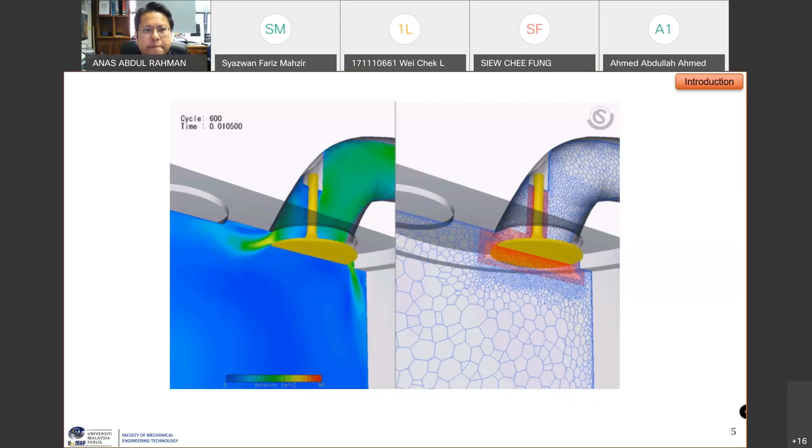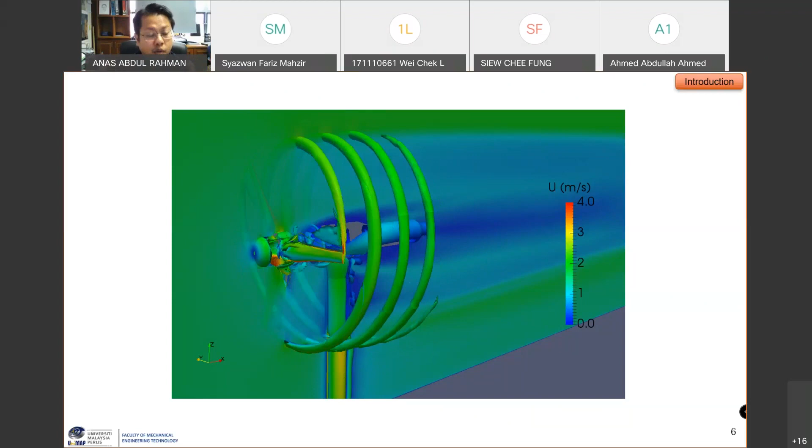But by using CFD, as you can see over here, this is just for one turbine, we can see the clear phenomena happening when the turbine is rotating, and also the wake. The most important part for this problem is the wake generated behind the turbine, downstream. Okay? So then we can plan, for example, instead of a squared array, we can use a staggered array. Instead of too close, let's say 1 meter behind the turbine, we can now put the second device, let's say, 2 meters from the first row.

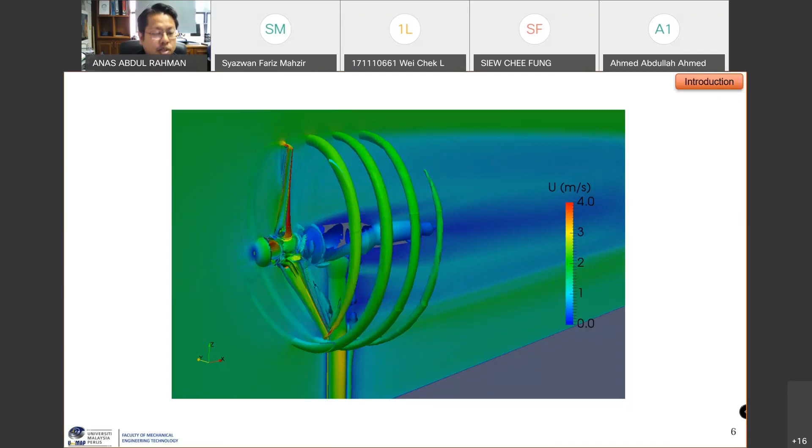So the purpose of today's lesson is basically just to give you an overview of the importance of CFD, but also to keep us grounded. CFD is not a solution for all. We are going to discuss later how CFD can be used to simplify a lot of engineering work, but it is also dependent on experimental as well as analytical solutions. Okay. As usual, if you have any questions, please feel free to stop me.

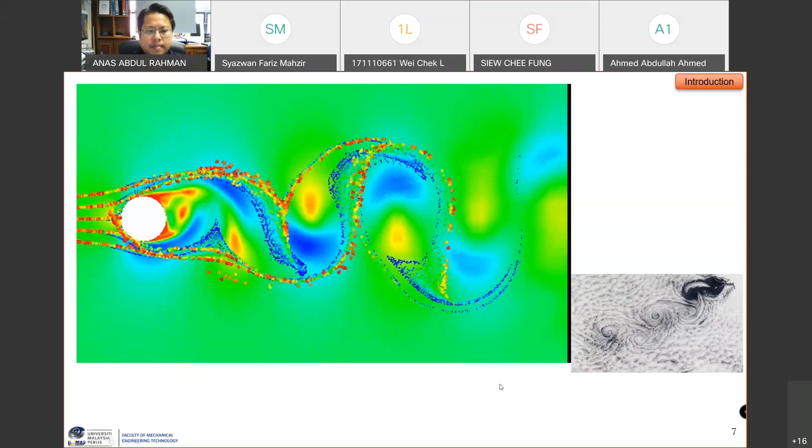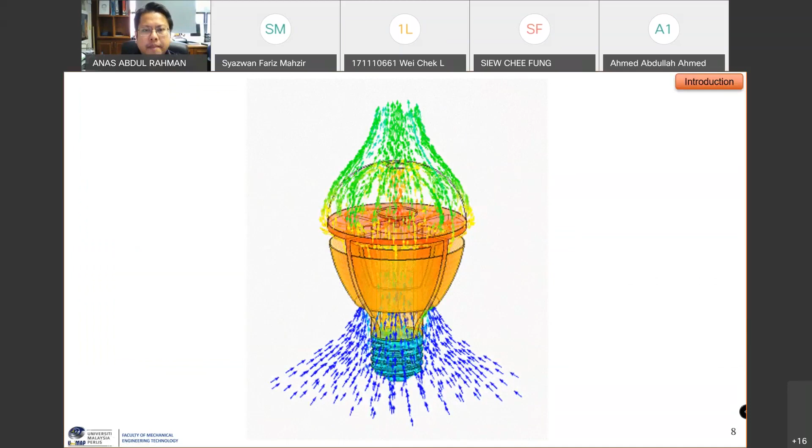Okay, so this is another example. Basically, I think this is the flow around a light bulb to see how the heat can be transferred efficiently. So this is just another example of how CFD can be used to simplify our work. Okay. All right. Just something for you to ponder.

But how do you measure the validity or the accuracy of the result that you produce? I think that's the key here. Hopefully this course can cover that. We want to make sure that the output that we produce means something. It's not just when you put something in, you get something, and that's it.

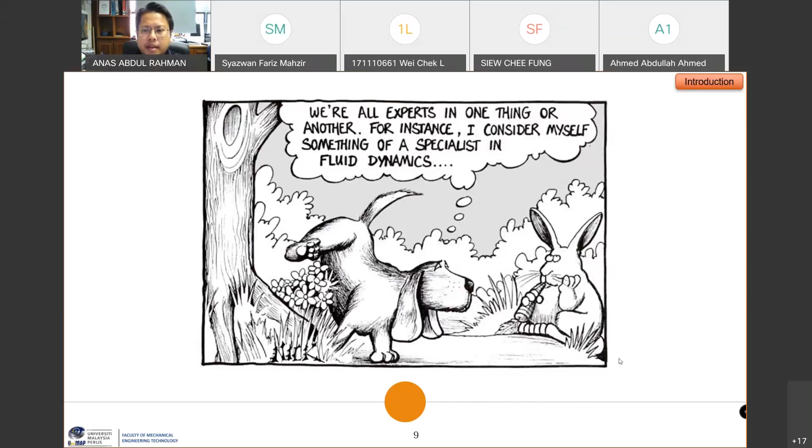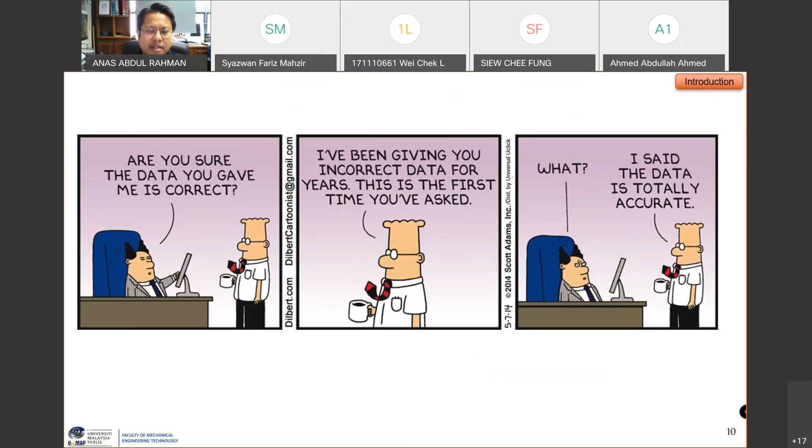All right. So another cartoon. Okay. So it all reflects again to real life. Everyone can do something, but in the end, the output that you produce, hopefully it means something for us or for the lecturers or for your work. So I think that's the gist of this cartoon. Okay. Again, similarly.

So in the end, from the three cartoons that I shared before, there is a phrase that is usually used in IT. They call it garbage in, garbage out. What it means is, if you have garbage as an input, for example, you have an input over here, something, A, B, C, D, and then you process it, the output will still be garbage. So this term is quite important in CFD.

I would like to emphasize this again. It relates to what I said before. Everyone can use CFD. Everyone can use CFD tools, ANSYS for example. But the point of using CFD is to produce meaningful output, meaningful results. So if you put garbage as your input, let's say you define your boundary, but you define it wrongly, then you will get some post-processing pictures, the lovely contours that you saw just now.

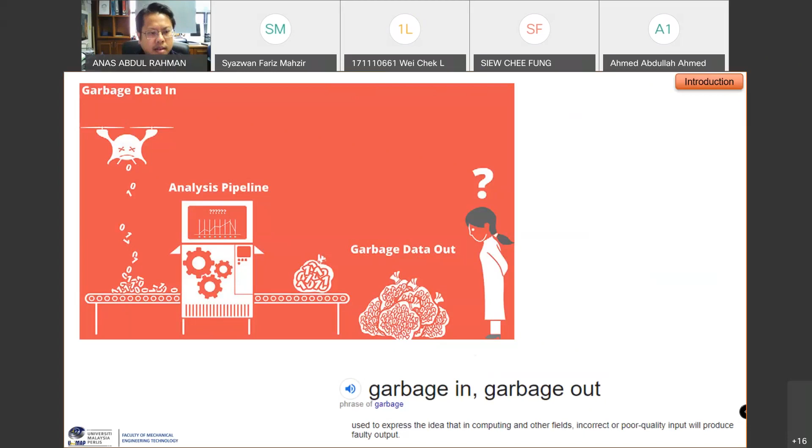But in the end, the contour looks nice to the naked eye, but for those who understand how the physics works, how the mathematical model works, we know that something is not right. So hopefully from this course, you will be able to differentiate good output and bad output for the CFD process.

So what is CFD basically? It just means computational transport phenomena. It can involve fluid dynamics, heat transfer, mass transfer, or any other processes that involve transport phenomena. For our course, we will be dealing mostly with fluid dynamics, so movement of fluids. CFD can pretty much simulate any phenomena related to fluid dynamics, heat transfer, mass transfer, but we have to understand what is behind the tools, which will be covered in the black box later.

If you just know how to use a software, but you do not understand what is happening behind the software, then it will be troublesome when we are dealing with the output or post-processing, because you will have no idea whether your output is reliable, whether it makes sense, or whether it is just garbage.

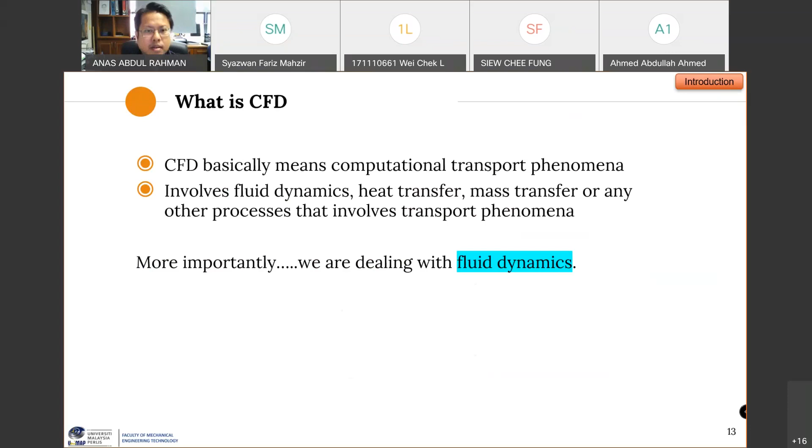All right. So since we're dealing with fluid dynamics, as you are aware from Fluids 1 and Fluids 2, all fluid dynamics phenomena, transport phenomena, can be summarized into this one equation that is called the Navier-Stokes equation. The Navier-Stokes equation shown here is the main equation for all fluid problems that we are going to look at in this course.

So this is again from Fluids 1 and 2, so hopefully you are aware of the Navier-Stokes equation. And in the second part of the course, we are going to derive how we can get from the continuity equation and the momentum equations to these Navier-Stokes equations. So we're going to derive that. All right.

So in a sense, the pretty pictures that you produce for your work, if they can be translated into mathematical equations or governing equations, this is basically CFD. All these pretty phenomena, all these pretty contours that you look at over here, this is the aerodynamics of a lobster. As you can see, they are all related to the governing equations of Navier-Stokes, of momentum. This is the continuity equation, conservation of mass.

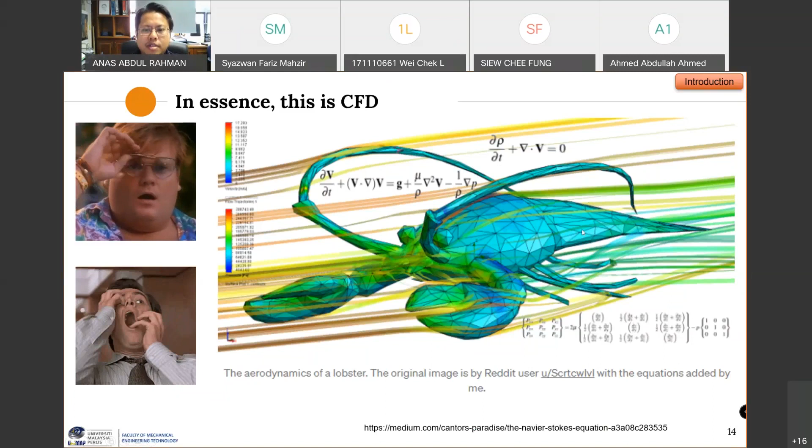So behind these pretty pictures basically lie detailed governing equations that need to be fulfilled before something like this can be produced. Okay. So let's continue.

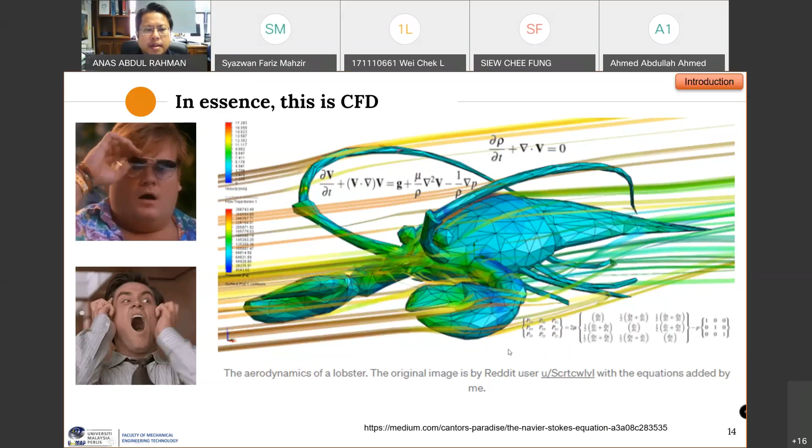All right. So just to recap briefly, we are going to cover this in detail later on, but there are two types of fluids. One is called the Newtonian fluid, the other one is non-Newtonian. For Newtonian, the fluid's viscosity is constant. For example, we have water, mineral oil, gasoline, and alcohol.

For non-Newtonian fluid, the viscosity is not constant. It changes based on temperature or pressure, for example. Examples we have over here are ketchup, honey, or glue. For glue, if you notice, if you keep on stirring the bottle glue, the viscosity will change.

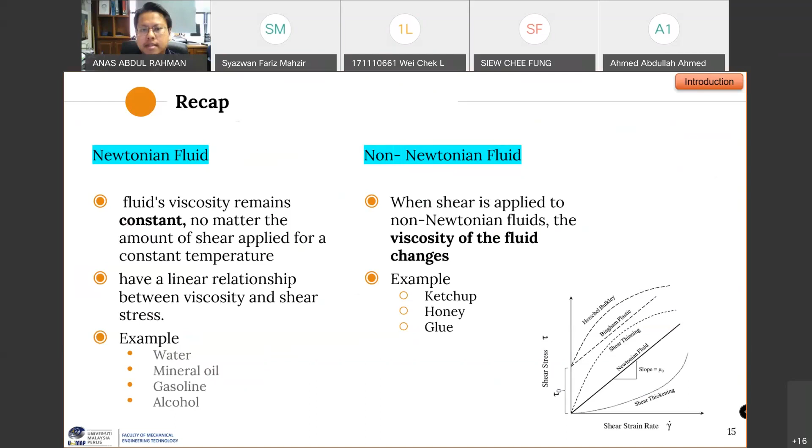Ketchup as well, it's quite gooey if it's in the bottle. But once you put it on your bread and spread it, then the viscosity changes. So that's an example of non-Newtonian fluid. Okay. So let's discuss CFD applications, where we can use CFD knowledge.

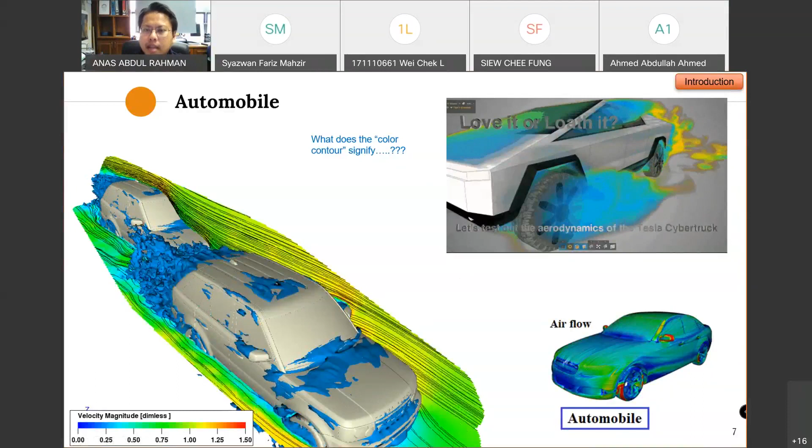So it's quite detailed. This is just one example of how CFD can be used to investigate a phenomenon. And of course we can also check the drag or lift, the aerodynamics of the wings of the aeroplane.

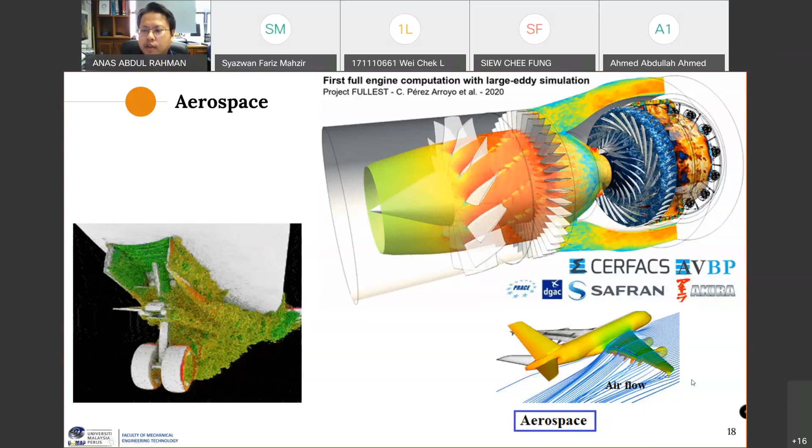Okay, so then the CFD output that you have has to be validated with the experimental data. So you cannot just rely on these pretty pictures. When you put some values, you get the output, then you say, okay, this is the work that I did, and these are the figures that I got, so this is how the heart functions. You cannot just say that in a scientific paper. It has to be validated, for example, with experimental data.

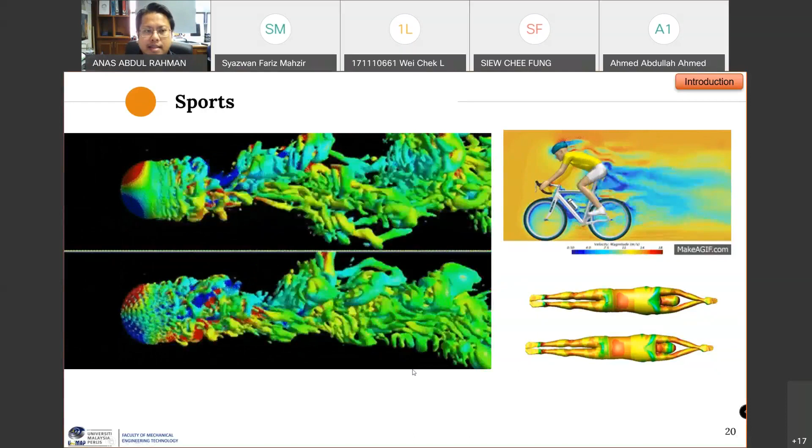They use a full suit swimming suit, which basically reduces the drag in the water. Okay, so they did the simulation basically just to see the most important part that they need to reduce the drag on the body. So this is again examples of CFD applications in sports.

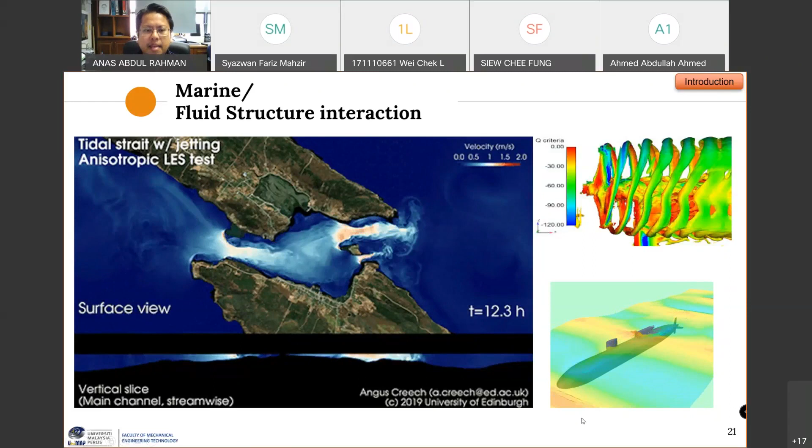As well as for the submarine, the design of the submarine. You know how expensive a submarine is. It can cost billions of dollars. So instead of building a prototype, they just use a CFD simulation to see the drag, and how they can optimize the design of the submarine. Other CFD applications, the ones I mentioned were just the main highlights. I'm not going to go one by one, just highlight a few.

Basically, there are so many applications that CFD can be used on, which I think becomes important for you to get some idea or to have a bit of knowledge going into the industry. At least you have something that says, okay, I know how CFD works, I can analyze the output, and I can use CFD tools. I think that's the key here.

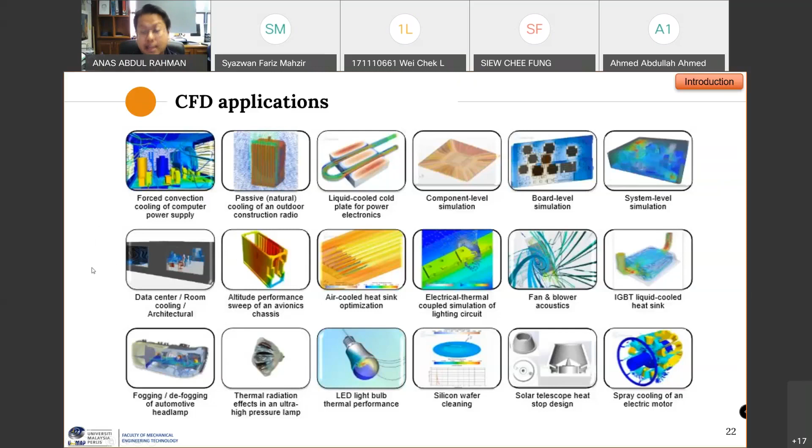Okay. All right. So let's take a 5-minute break. We are going to continue after 5 minutes. Thank you. Okay, so let's continue.

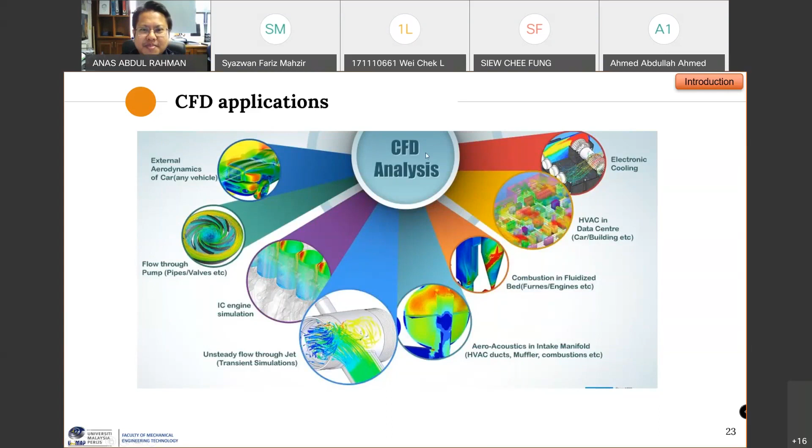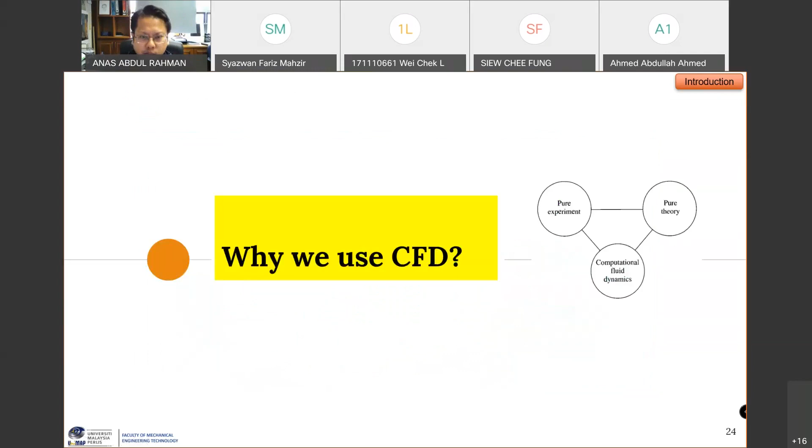Okay, so next, let's discuss why we need to use CFD, and more importantly, the relationship between CFD, experimental procedure, and analytical solution. So quick question for you guys: at which stage of design do you use CFD in all the examples that we discussed before? Please give some comments. I'm waiting for your comments. You can use the chat box or you can just unmute. At which stage do you use CFD in the examples that we discussed?

Okay, so from Teva, after we're done with the detailed design of a project, yes, partly true. You need to have at least some information on your design, on the input, output, final design. After designing, that's final design, that's true. Before we come up with a prototype, that's right, from, how to pronounce your name? Tiswara, hopefully that's right. So thank you for the response. Basically, all the comments that I received were valid.

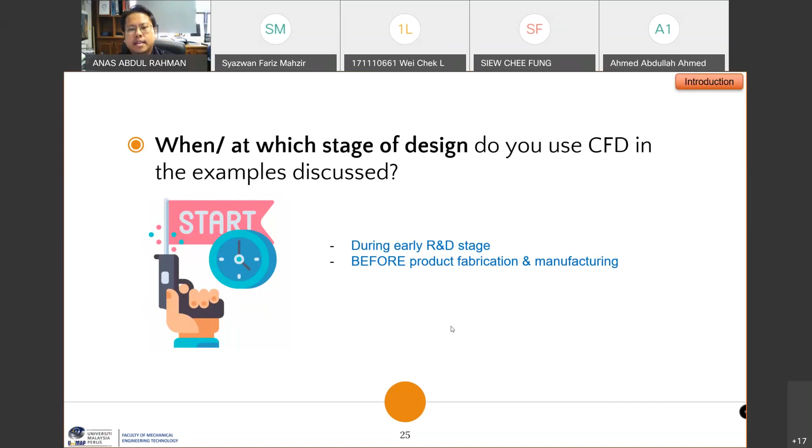So basically, you want to do it as soon as possible when you have all the finalized data on the product. So why is it needed? One example is for systems that are difficult to test through experimentation. The example I showed just now: if a company wants to deploy tidal turbines or a farm at any particular location, the deployment is very, very expensive. First, because the technology itself is not mature. Secondly, not many companies are doing this now.

So when you have something that is limited in supply, you need to be very confident with your design as well as your decision on the location. For tidal turbines as well as wind turbines, the location plays maybe 60 or 70% of your decision, because you want to place your device at a location that can extract the highest amount of kinetic energy. So how are you supposed to conduct experimental tests for something like this?

Can you just measure the velocity at the inlet of the strait on the left side, and then measure again on the right side? If you do that, you need basically thousands of measurement data in order to identify the right locations. So that's one thing. And it's not just this location that you need to identify.

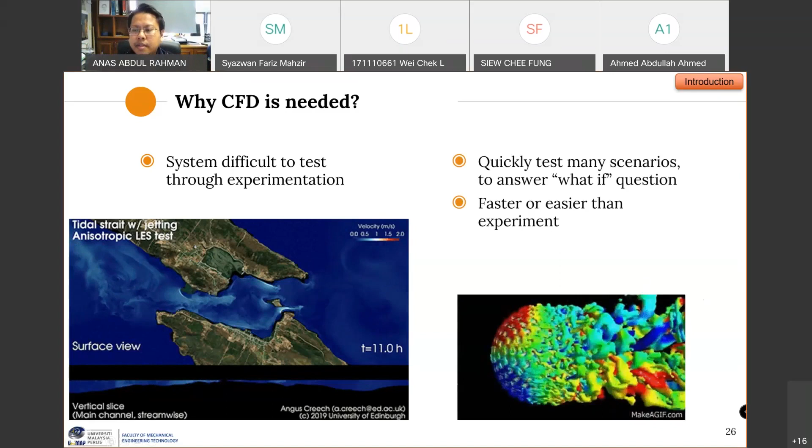Okay? And the other reason is basically we want to quickly test many scenarios to answer what-if questions. For example, the golf ball that we have over here. We just discussed the importance of the dents on the ball. For example, if I ask any of the students here, how many dents do you think is the optimal number for us to use on the golf ball? Can anyone answer that on the fly? I think it will be impossible.

But if you are to conduct a test, let's say between 1,000 dents versus 1,500 dents, it answers the question, what if we increase the number of dents? What if we enlarge the size of the dent? What if we use a different design of the dents? So it answers the what-if question.

So instead of wasting money on the prototyping procedure, for example, you need hard material, you need to buy equipment to conduct the experiment. Now you just need one simulation to answer your question. But keep in mind, simulation software itself is quite expensive for the commercial one.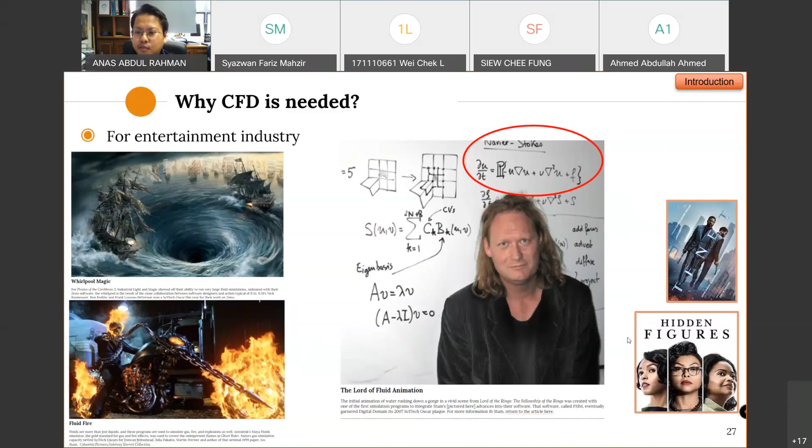For Hidden Figures, this is a very good movie. It's basically about a group of women who were the main force behind NASA in the 60s or 70s, if I'm not mistaken. They were not rejected, but they were not treated with respect. And it's all about engineering, what you learn in statics, what you learn in dynamics. I think this is a very good movie for you to watch. Okay, all right.

So now let's have a look at the comparison between CFD and experimental investigation first. For experimental work, if you're doing full-scale work, let's use one example. A tidal turbine is quite simple. Or a wind turbine, I think everyone is quite familiar with wind turbines. One blade of a wind turbine, not the whole wind turbine, can reach up to 20 meters. Just one blade.

Just imagine if the wind turbine has 3 blades, including the nacelle part in the middle. So let's say you're using 20 meters, nacelle part another 2 meters. So you have roughly about 40 meters in length. Not to consider the materials that you need to purchase. So if you're dealing with full scale, it's going to be very expensive and often impossible.

Impossible here, for example, in terms of the tidal turbine. If you want to deploy 50 tidal turbines, it's impossible to put everything under the sea and then test and realize this is not the best location, or the design is not correct, or the arrangement is not the best, and then decide maybe we need to change location. It's not possible, because the scale is large and expensive. It costs a lot. And of course, it deals with measurement error.

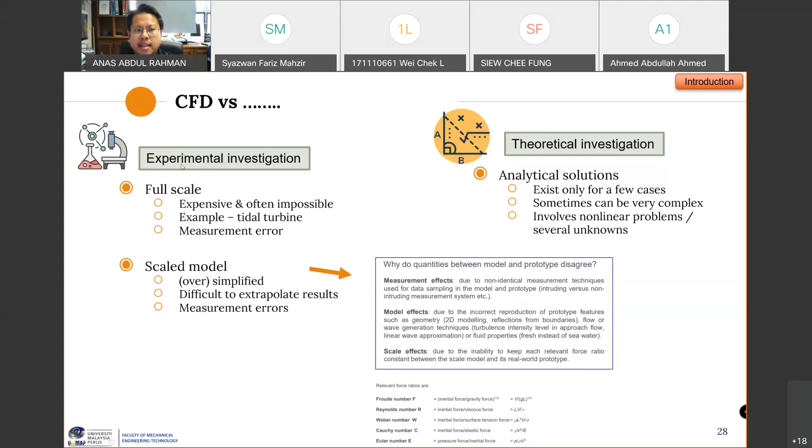Because when you want to build something from real size into a smaller size, you need to consider the change, you need to account for some of the physics happening. But even with Froude numbers, you cannot 100% replicate what is happening with the large scale models. So this is the difference between CFD and experimental and also the analytical work.

So to summarize, analytical work only works for really, really simple cases, and mostly you have to make some assumptions, which we're going to look at later. For example, is it a control volume problem? Will it be an infinitesimal model? Infinitesimal means a very, very small model. Once you get that, you need to start working on that one particular problem. Remember, you have to work one problem at a time.

So for example, this analytical problem, which we are going to look at later for the momentum equations, how do you define it? If you are just looking at one direction, the X direction, what are the forces, shear forces as well as the stress forces, acting on the element that we choose? So this is for analytical. For simple cases, it might be possible. But if you are dealing with something as complicated as a tornado, the solution might be impossible to get.

So computational, which is CFD, what we're going to look at, can be just as accurate as experimental work, plus you can get the information cheaper. Again, cheaper here is subjective. As I said, you have to consider the price of the license and the price of the computational equipment that you need. But in general, it is much, much cheaper in the long run compared to experimental work. Experimental work is limited and expensive.

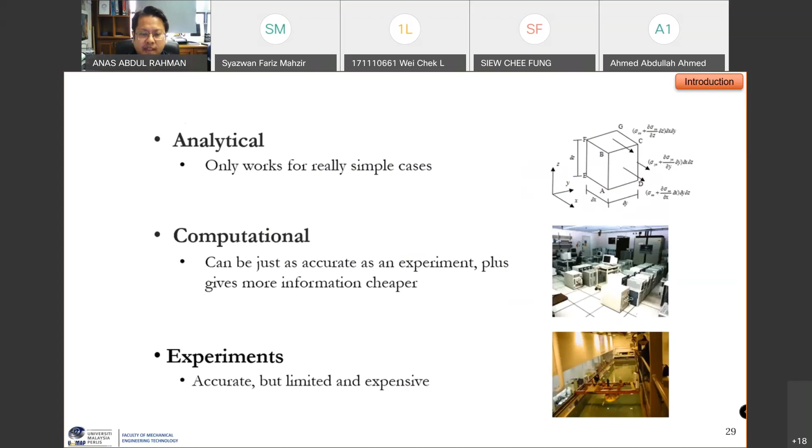So the next question: does it mean that CFD is superior to experimental or theoretical investigation? I think that's the question everyone is asking now. The answer is no.

If you look over here, this is from the CFD books that I screenshot from. So this shows the 3 dimensions of fluid dynamics. It does not say CFD is fluid dynamics, meaning that in fluid dynamics, you need the combination of these 3. You need CFD, computer work. You need analytical solution or theoretical solution, as well as experimental work. They are all dependent on each other.

So you cannot say that CFD is the best compared to analytical solution or the experimental solution. No. Because, for example, CFD, as I said before, once you get the output in terms of the very, very nice looking colored contour, you have to validate that result. How do you validate that result? Usually with experimental work or maybe with analytical solution.

There might be some differences, of course, that is expected, because we are going to look later when we are discussing CFD tools. CFD, most of the time, can replicate the general phenomena, but sometimes if the phenomena is too complicated, some assumptions need to be made. So when you make some assumptions, meaning that you lose some of the data.

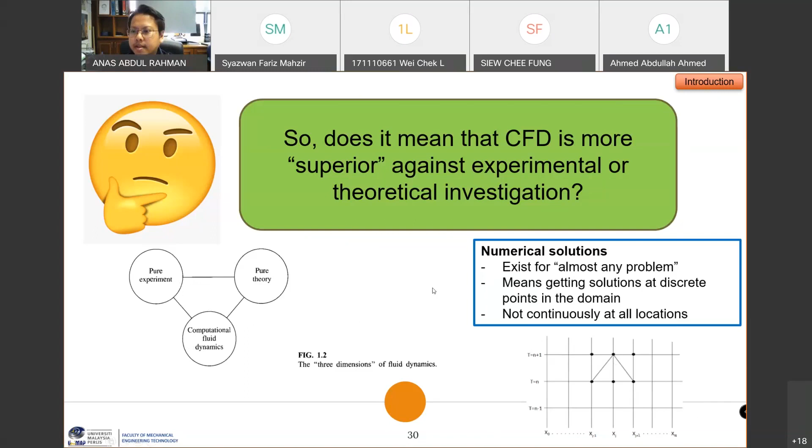So you have to keep in mind, of course, CFD is quite powerful, but there are downsides as well. They have to complement each other between experimental work, computational, and theory. So if you look at the pros and cons, there's a short discussion. The positive of modeling is it's cheaper. You have more complete information. Again, keep in mind, garbage in, garbage out.

Complete here is subjective. It depends on the user, and it can handle any degree of complexity as long as you have the correct input, a correct domain, a correct mesh; then your output is reliable. But if you have garbage in, then you're going to have garbage out. But the negative of modeling is that it deals with a mathematical description, not with reality, meaning that it depends on the mathematical solution.

So later, we are going to discuss basically how do you know that your calculation is completed for the CFD tools? How do you know that the iteration can be stopped? How do you know that convergence has been reached? You need to know that before you can accept the result.

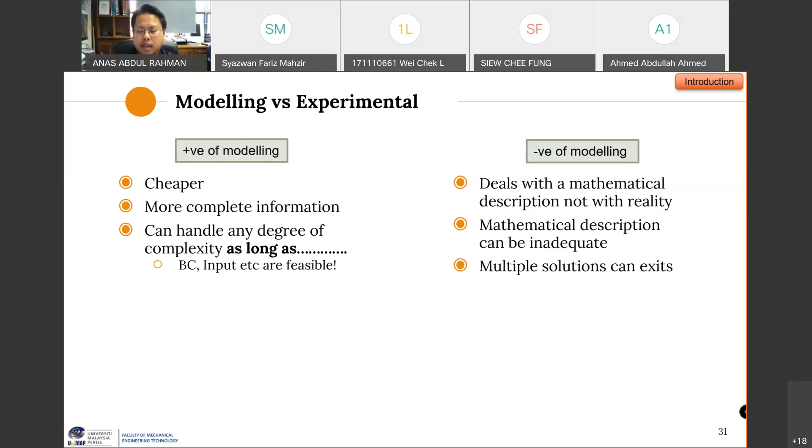Mathematical description can be inadequate, remember, because we are dealing mostly with assumptions. Sometimes when the shape is too complex, we are going to make certain assumptions to simplify the shapes, for example. Okay, so it can be inadequate. And then you have multiple solutions. For example, you cannot just say, okay, this is my output, this is the only result that exists. You can get multiple solutions, which can be a problem.

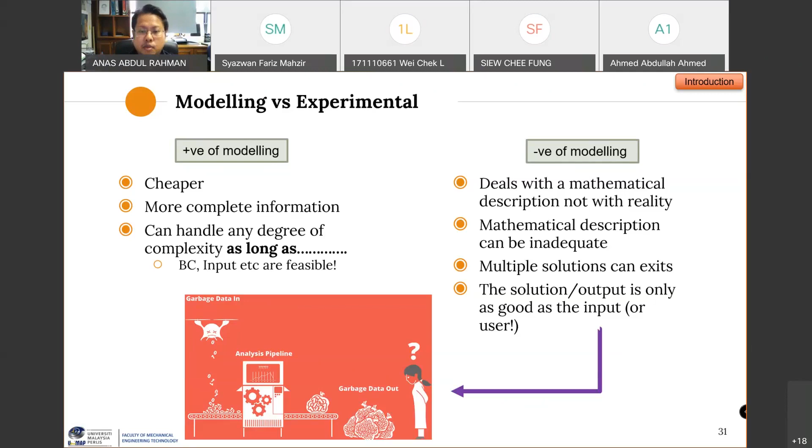And at the end of the day, always remember garbage in, garbage out. So hopefully by the end of this semester, once we finish with the lab and case study, you get some idea on the good practice or the good CFD techniques that can be used later on. Okay, so in summary, what we are doing for CFD is to put all this under one roof.

You have the physics that you want to look at. For example, in this course, we are going to focus only on fluid flow. Since it's quite powerful, it can be used for heat flow, phase change, and so on, but we are just going to focus on fluid flow. So to simulate fluid flow, you can do experimental analysis, but we discussed that before, the pros and cons.

If you want to simulate the fluid flow phenomena, there is a governing principle. This is what we're going to look at later, which is the momentum equation, the continuity equation, which is conservation of mass, and just a bit on the energy equation. So you need to have these governing equations or governing principles. Previously, I think Sue asked, will the governing principles for FEA or FEM be the same as CFD? There are slight differences, which we're going to show later. So there are mathematical equations involved behind the tools. That's what I want to highlight for this course.

You want to look at the assumptions or the feasibility of the problem. And of course, there will be errors because we make some assumptions. We cannot replicate 100%, but we have to accept that this output is acceptable within the range that we decide. So for numerical solution, there are several methods: finite volume, finite elements, as well as finite difference. We are going to focus on the finite difference method. For numerical solutions we have errors and stability, which we're going to touch on later in the semester.

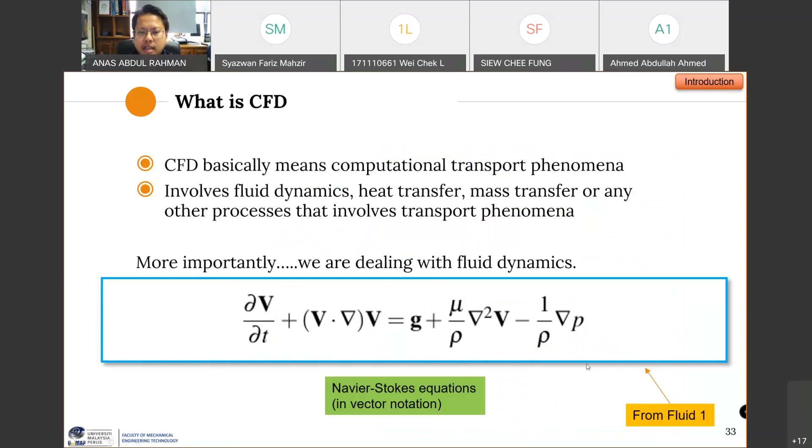Again, to recap, we covered this at the first slide. All in all, it goes back to the Navier-Stokes equations. We want to solve the Navier-Stokes equations before we get the pretty pictures that you're looking for. If you look over here, we use the plural form for this one equation. These are the Navier-Stokes equations because it represents three equations in vector form. Three equations, keep in mind.

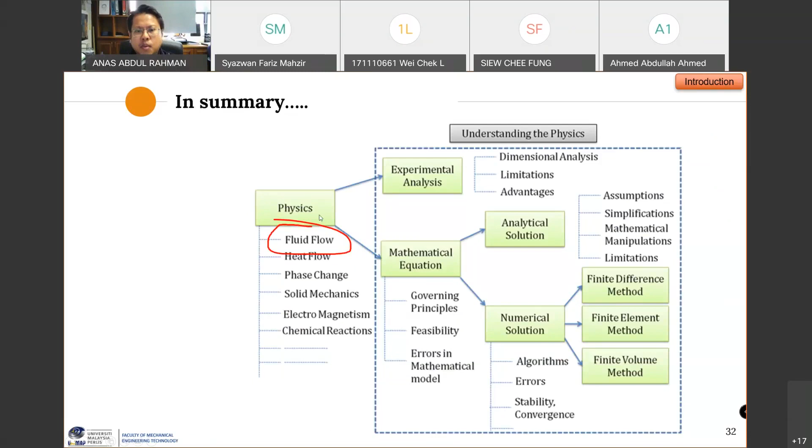So when I ask you later on, what do you understand about Navier-Stokes? You can say Navier-Stokes is a combination of three main equations, which are based on the three fundamentals of the physics that we looked at before. So the physics: what are the governing principles? For Navier-Stokes, the governing principles are conservation of mass, conservation of momentum, which is Newton's second law, F equals ma, and energy conservation.

That's the governing principle. Now the governing equations related to the three principles: for the mass, we are dealing with the continuity equation. For the momentum, we are dealing with momentum equations, F equals ma. And for energy, the energy equation. So you need to understand where the Navier-Stokes equations come from. We call it Navier-Stokes equations, plural, because it is a combination of continuity, momentum, and energy equations.